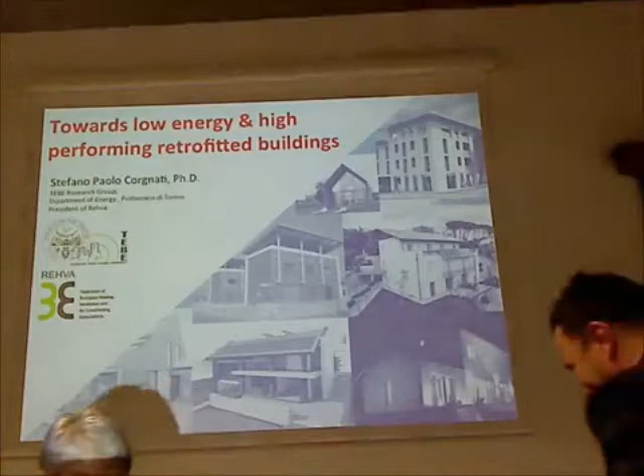The title is related to one of the main topics of the seminar. We have this big challenge to achieve, in a suitable number of years, this big dream of zero energy building. Of course, it is a path - we cannot think about having this immediately. I had the possibility to work a lot on this topic in research, but also with the European Commission, because now I'm president of REHVA, I've been on the board for lots of years. This is the European Federation of the HVAC system sector, so we work a lot with the European Commission in establishing the new directive and the new path toward high efficient buildings.

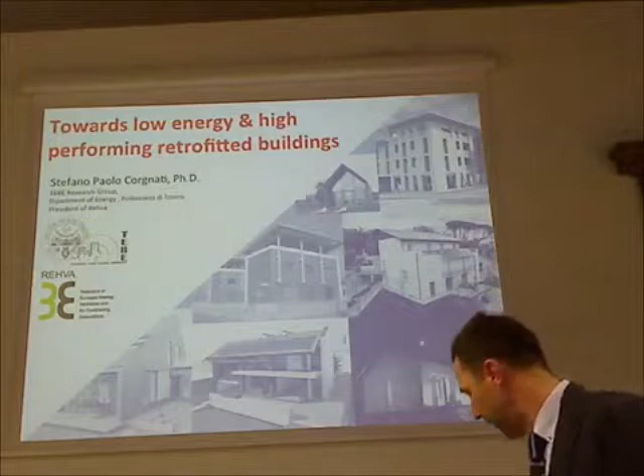As we know very well, now we are dealing with the second recast of the Energy Performance of Building Directive.

I think that at the very beginning of this century, there was an important mission of the European Commission where we set buildings as a priority in order to improve our capability to reduce CO2. But I think the main directive was the first recast, in 2010, that put into reality our main focus: that if we want to drive the energy sector related to buildings toward high efficient buildings, we have to think together economy and energy. This is the main issue we worked on during the definition of this second directive.

As we know very well, if we look at the effect at national level of this kind of directive, we have to say we are not so happy, because the directive puts forward the vision that you have to have transposition at national level. In Europe, as you know very well, it's quite a heterogeneous situation, so it is not easy to have the same approach in all countries. The situation country by country is very difficult, both from a technical point of view and from the economical point of view. So the answer of the market could be, and in reality is, very different.

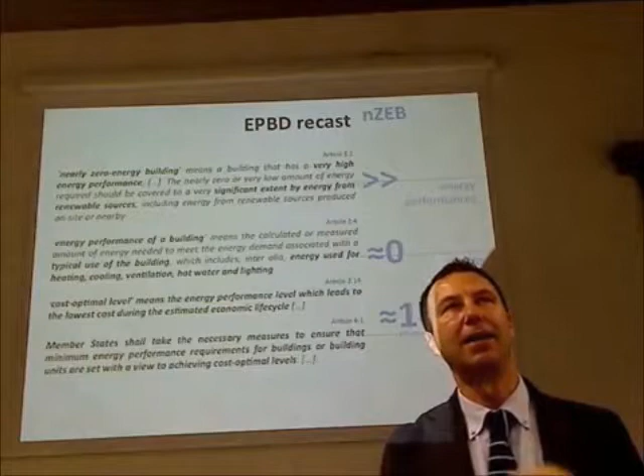When I'm teaching this topic, I explain that at the very beginning, when we start to design a building, we have some points that drive our concept. First of all, we should emphasize the reduction of the energy demand - that is, to do our best in order to reduce the energy demand of the building itself. That is typically called in architecture all the passive systems that we have around the building.

Then we have the second step, mostly related to my background, that is to use high efficient technologies. I'm a mechanical engineer, so let's say all the technologies that are inside the building and around the building - that is to reduce the energy requirement of the building.

And then, as we cannot think about having zero as energy demand, we have to supply the residual energy requirement of the building through renewable energy sources. So from the design point of view, it's very clear, and through this step we can drive the building up to a position where we can really reduce the use of fossil fuel in the building.

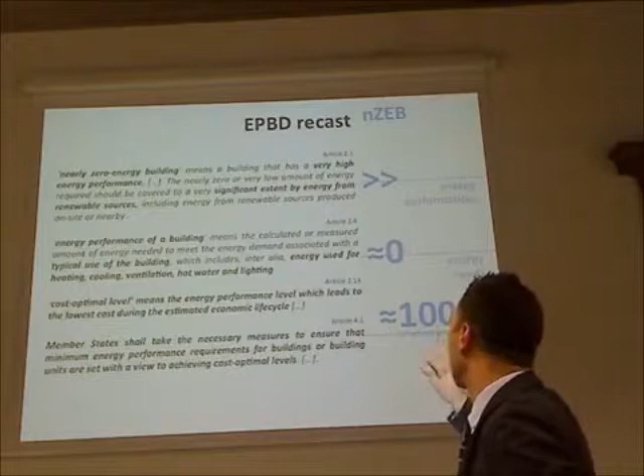High energy performance, almost zero energy need, 100% renewable energy sources, let's say. There is another important step: when I say zero energy need, we have to think about what is really zero, because we have some energy use that we cannot cancel, because they are part of our lifestyle.

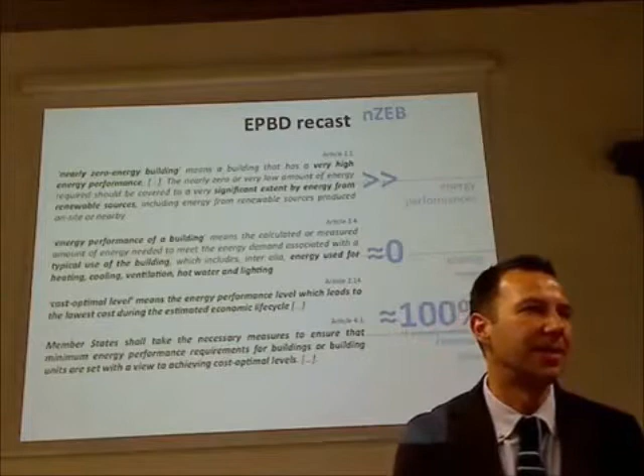Especially we have all the electrical requirements, so when we set zero, we are saying that we try to reduce as much as possible all the energy needs related to creating a comfortable environment in the building, typically related to heating, cooling, ventilation - air movement and mechanical ventilation is really a key issue. Another important issue is related to domestic hot water production. We can improve our capability to produce renewable energy sources, but we cannot think about having zero energy need in the building.

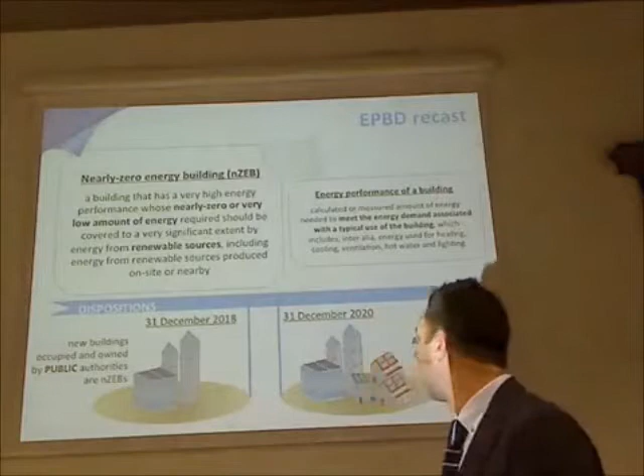As we know very well, the target is very ambitious, and now we are speaking also about public buildings. The next year is very challenging because we should bring this kind of concept into retrofitting and designing new public buildings. I have to say our public sector is not so in line with this target, not only in Italy but all over Europe. Consider that the vision of Europe is really ambitious, because in our roadmap up to 2050 we are targeting 90% CO2 reduction in buildings. That is really challenging. So, okay, we put the target, then let's do our best.

This kind of topic is also not so clear in its implementation. First of all, we have different approaches in the US, China, Europe, India, related to what we want to score. We introduced the concept of net zero energy building, the concept of zero energy building, the concept of zero carbon building - we are introducing lots of concepts. But at the end, I think what is really important is to have this final mission: to increase the energy performance of the building.

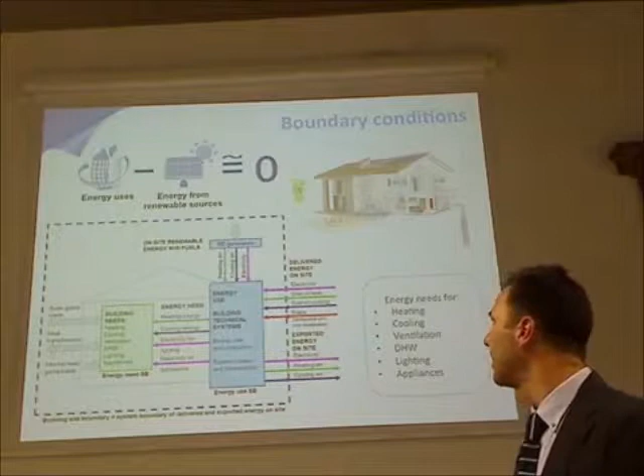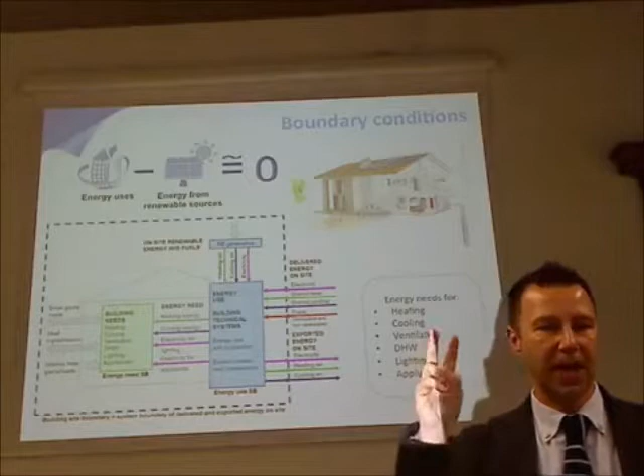So this topic is quite important to clarify at the scientific level, but I think it's so important to clarify at the practical level if we want to really implement this kind of concept, especially in the public sector. Here we tried, at least in Europe and the US, to have a similar way of representing the energy vector through the building. This is important, to have a common language and common way to represent things in order to put the boundary of the analysis at the same point.

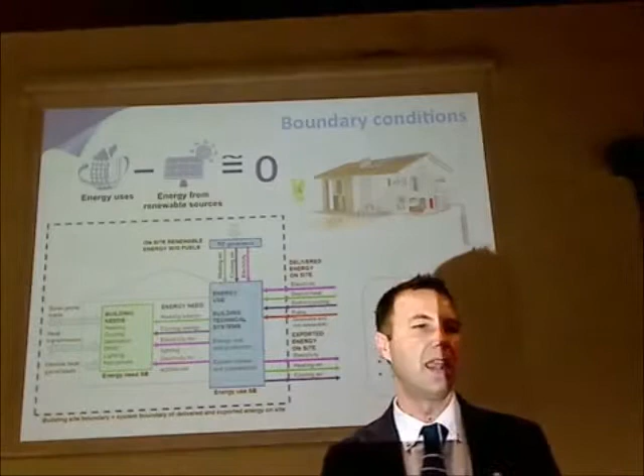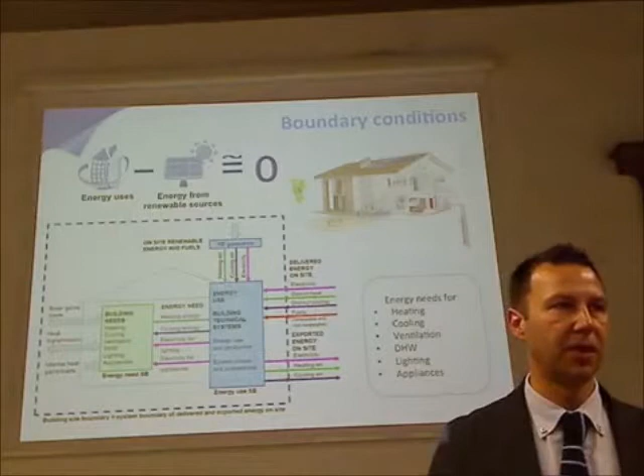This is another important issue - it's more scientific, but very important if we want to share and get the same results. Typically, if you look in the literature, you see lots of different papers explaining what a zero energy building is, or case studies related to zero energy buildings, but typically they have different boundaries of analysis. So the comparison is really difficult.

In reality, what is typically new in a high-performing building? Typically, what's new is that we tried to reduce a lot. I'm speaking about total space heating, to reduce this big amount that in a typical building is required for space heating. This was the first approach all over Europe, both in North and Mediterranean countries. We focused a lot at the very beginning on reducing the share of heating energy demand. So the first focus was to increase insulation a lot. If you see all the mandatory activity we had, it was mainly to increase insulation.

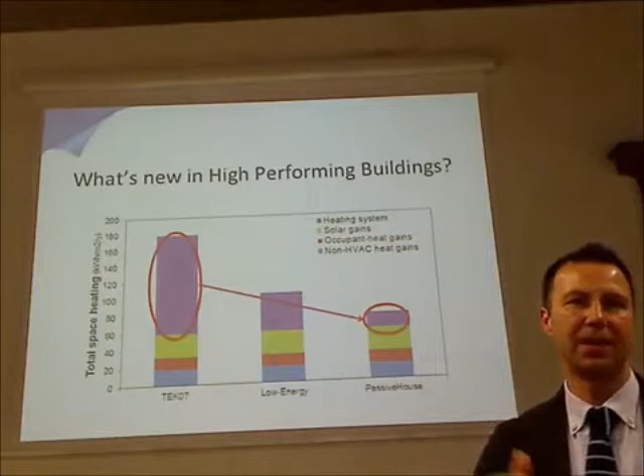Up to the concept of passive house, that was, as you know very well, created in Germany, then spread all over Europe with very, very dangerous effect, especially in Mediterranean countries. Okay?

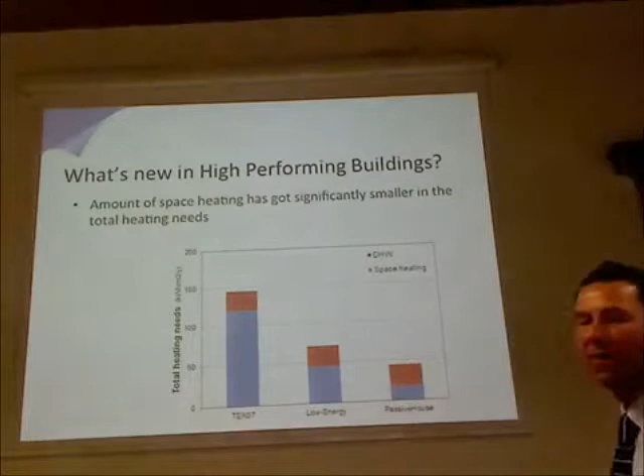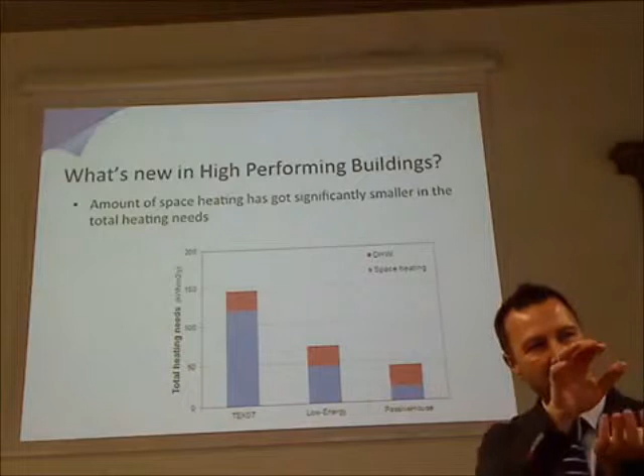But what is for me really interesting from the designing point of view is that in our new buildings, the amount of domestic hot water, which is from the energy need almost fixed, is now comparable with the other energy use for climatization. This, from the designing point of view, creates a new approach, because now the priority is to create an efficient way to manage domestic hot water. That is something new, very interesting, if we have time to do this.

So I tried here, from our point of view, to put some key issues. Big reduction of heating loads, that is to reduce the nominal power of the heating system. Then if we have a very small load, we have to be very reactive. The large share of domestic hot water. The other thing is to shorten the heating period. If you shorten the heating period, of course the payback period, if you want to invest a lot in the heating plant, it is very difficult to have a suitable payback period.

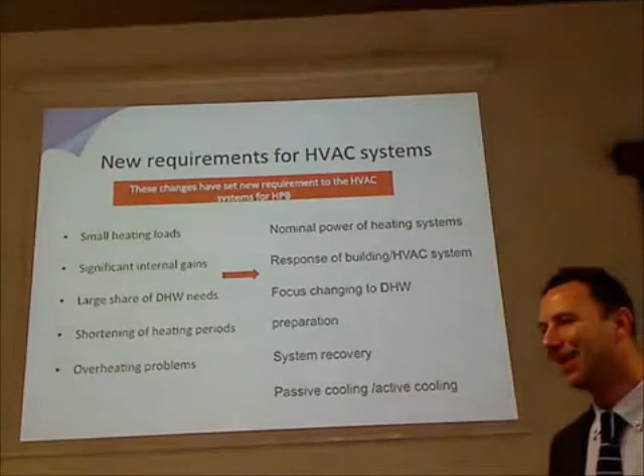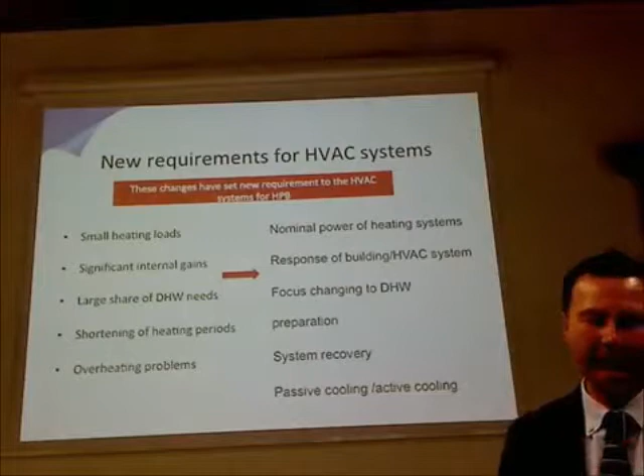And then this is a big problem now all over Europe, the overheating problem. All over Europe, from north to south, especially south, I want to emphasize the fact that we now have to deal with the other problem, that is to cool the buildings. And before cooling the building, it is better to apply passive solutions.

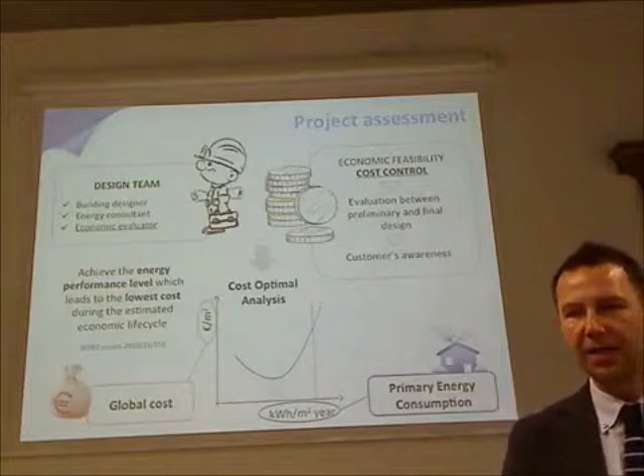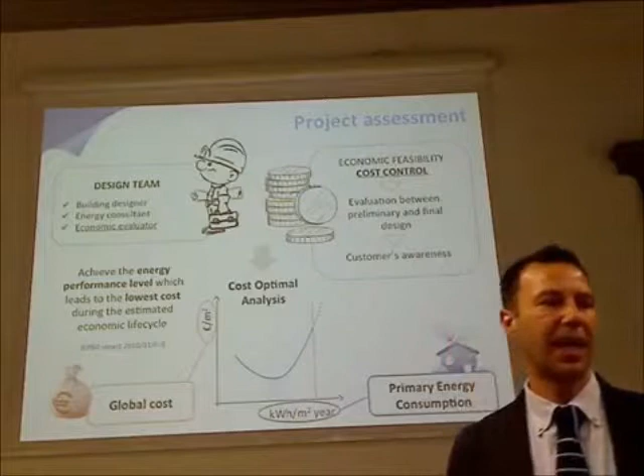This is the main part, the second main part of the presentation. There is a design approach, but I think what was really new in approaching a nearly zero energy building was the introduction, in the same analysis, of two important indicators: an economic indicator, we introduced the so-called global cost, but what is important for me is to introduce an economic indicator together with an energy indicator.

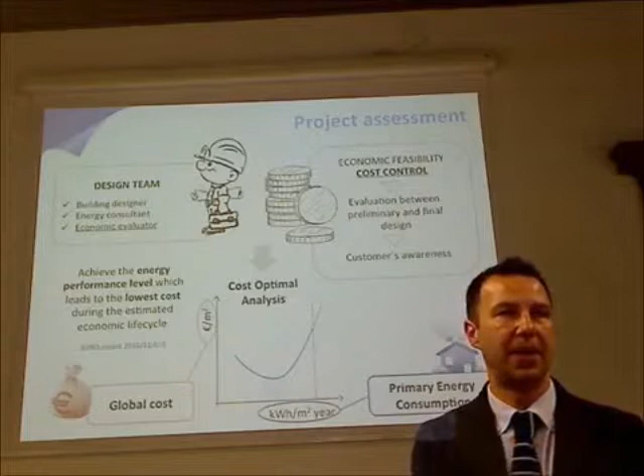Typically, we used global cost and primary energy. The primary energy indicator is, let's say, the main indicator used to classify the building, and we use here the so-called global cost.

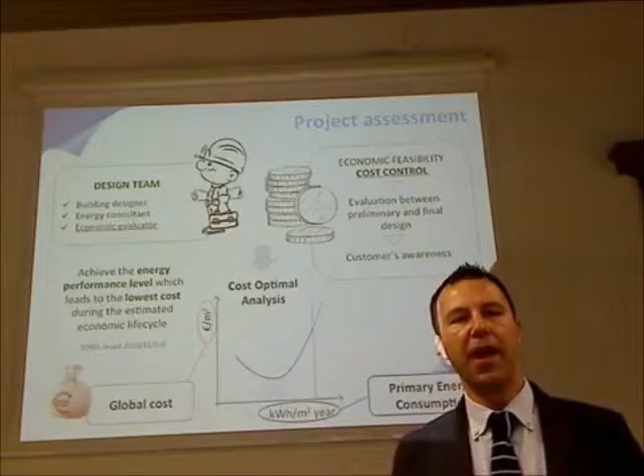Why do we use the global cost? Because we tried, in a quite simplified way, to have the possibility to think about all the costs over the life of the building, starting from the initial cost, that is the investment cost, up to the final value of the building.

So, in some way, we said that if we want to really score the goal of a high-performing building, we have to balance this trend. So we must not emphasize from the very beginning the energy performance if the market is not able to get this energy performance in reality. That is, we don't have to push the market up to an A+++++ building if the market is not able to get this building. And as we know very well, this was a very weak point in the first directive, because all the countries pushed a lot to have a very efficient building without any answer from the market.

In fact, the number of efficient buildings is very low. The market of retrofitting buildings is very low in comparison to the potential. Okay?

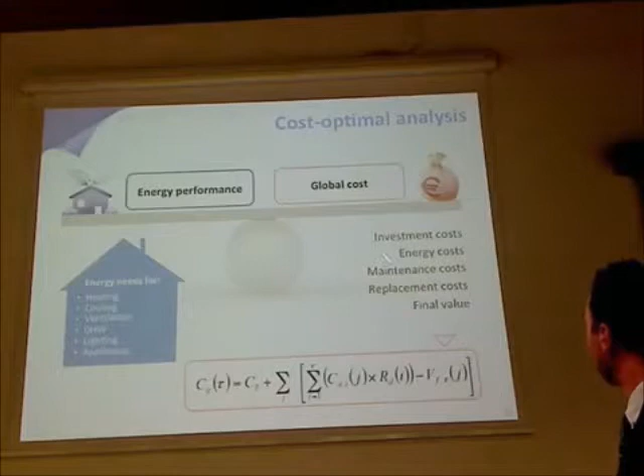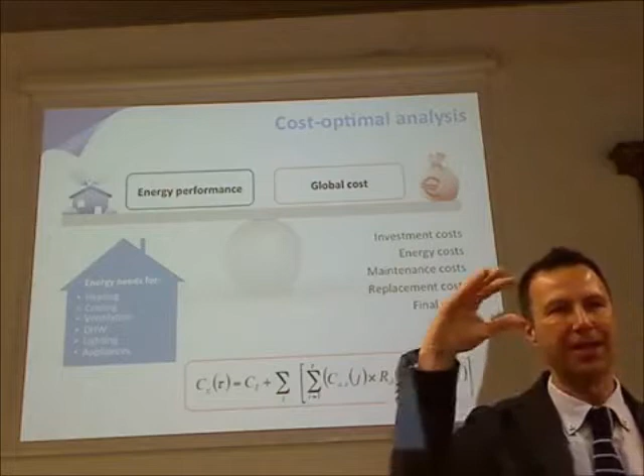This is the balance. Of course, we try to understand the investment cost, energy cost, maintenance cost, replacement cost, final value. I always say to my students, in the engineering and architectural faculty, that economic evaluation of a project is one of the key issues now if we want to understand the energy tendencies of the building market.

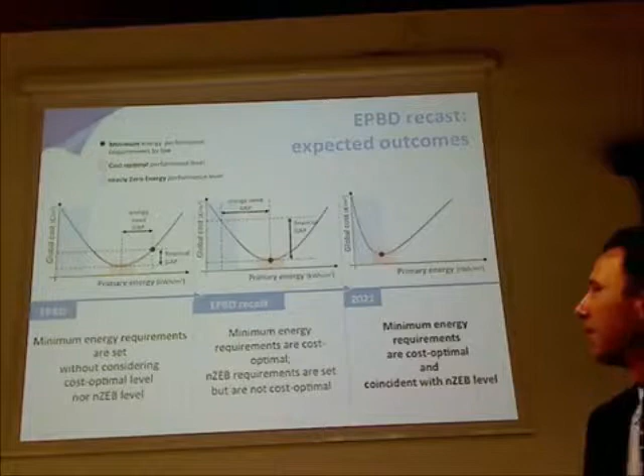The general results we want to score at European level was that if we set at the very... okay, what is the key issue? In this curve we always have a minimum. This minimum, or around this minimum, we have the so-called cost optimal range.

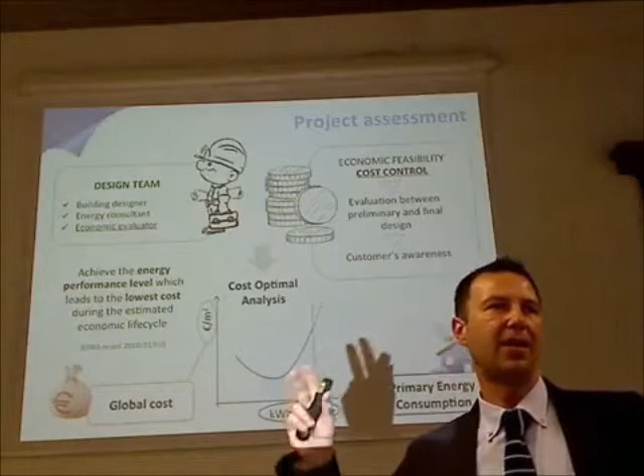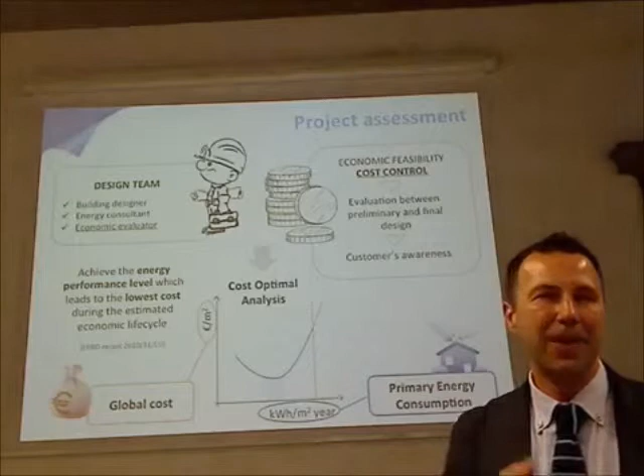The cost optimal range is the good trade-off between investment cost and operational cost. Here we have the investors that I call green investors, that would like to invest a lot, have a very clear objective to have a very high-performing building, and investment cost is not a problem for them. That is, the bank has to give you lots of money. So frankly speaking, that's 5% of the market.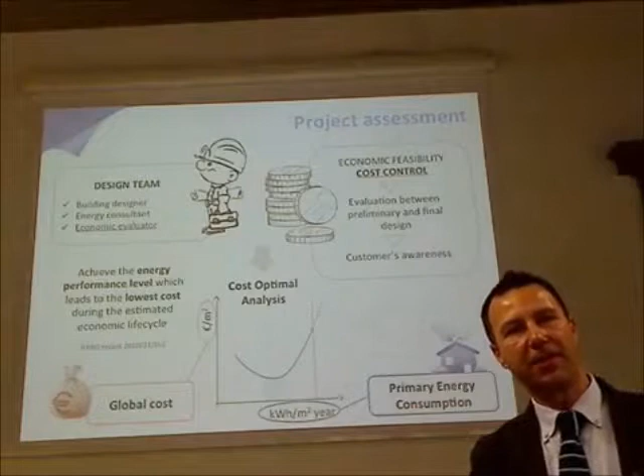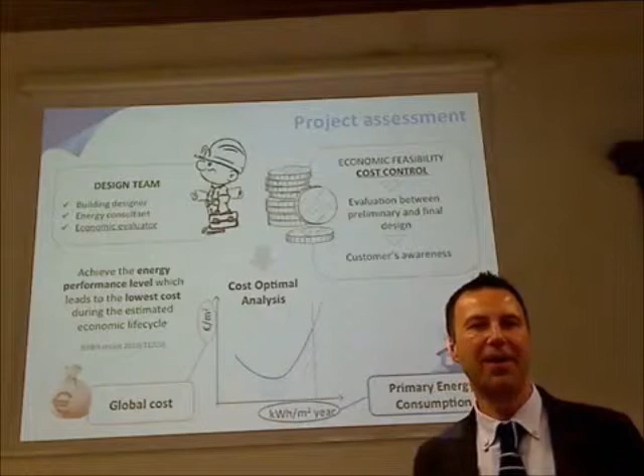Here we have the good trade-off between investment and operational cost, over the period of analysis that, according to the European Commission, is 30 years for a residential building and 20 for the other. If you speak to an investor, these are too long a period. But anyway, you have this balance - these are what I call the wise investors.

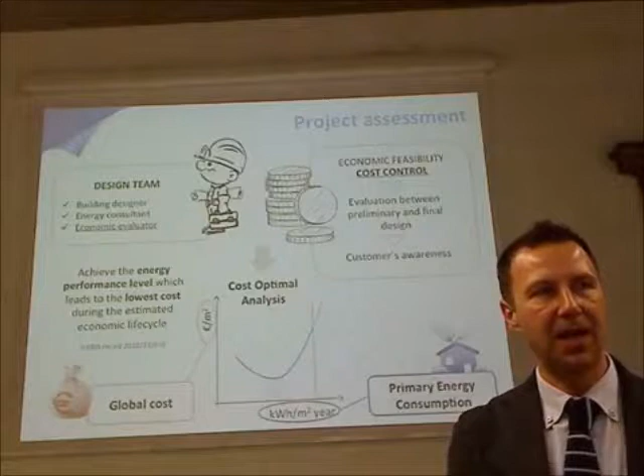Here there is a big potentiality of the market, which is to try to emphasize step-by-step improvement of the energy performance of the building through investments that are not so big, that can be spread through a very wide number of people.

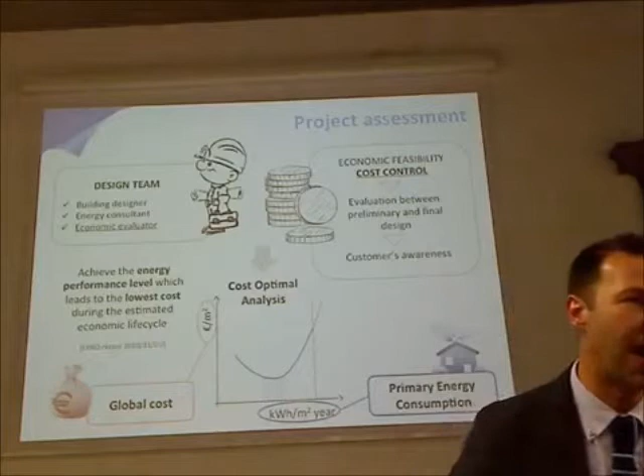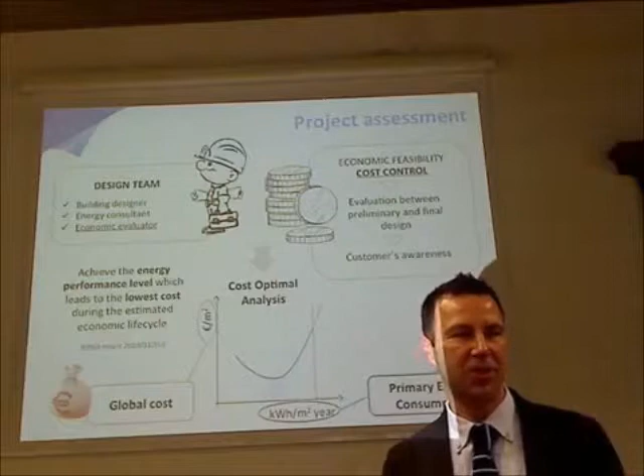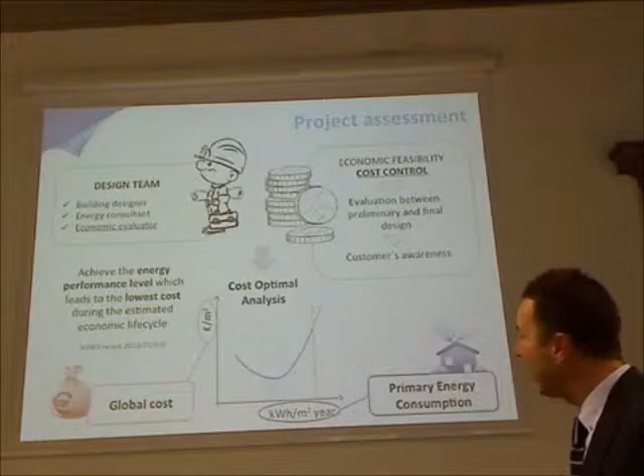This is very important from the energy policy perspective, because if I were tomorrow one of the advisors of the energy policy in our region, and I wanted to reduce highly the CO2 emissions, I should have the possibility to increase as much as possible this kind of market, and also this one - because this is what we did in some specific activity in our region, but related to only 5-6 buildings over the whole building stock. So they are good extreme examples, but they are not able to enter the market.

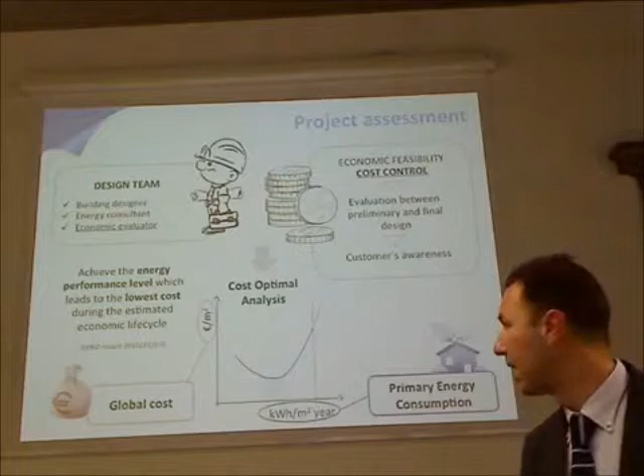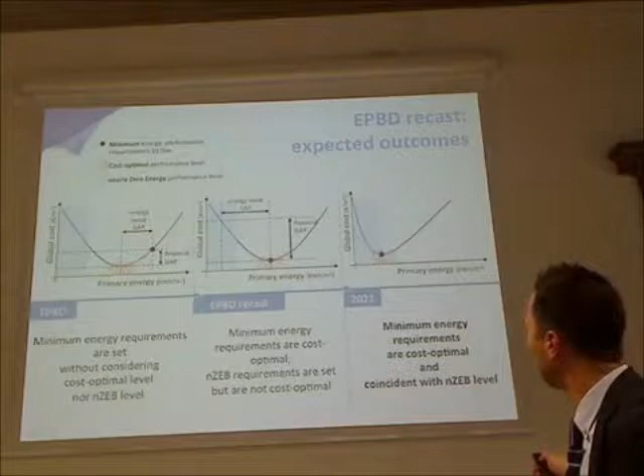The idea of the European Commission was to start in a situation where the cost optimal is around here, but through improvement and cost reduction of the technology over the years, this point moved little by little up to what we typically call nearly zero energy building, which is less than 30-25 kilowatt hours per square meter of primary energy, typically in our minds. So it's a path.

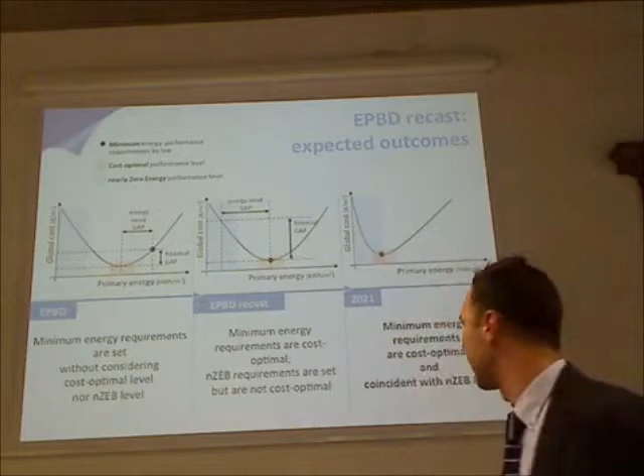The procedure is very interesting also for a designer. So it's not only interesting from the scientific point of view - we did lots of publications and that was fine for me - but also from the very practical point of view, because if a designer is able to use this kind of procedure, they're able to show the investor different options according to different costs and different goals.

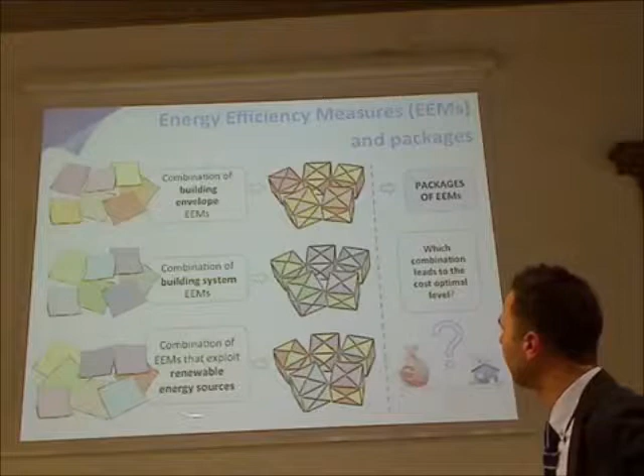So the idea is always, when thinking about retrofitting the building, to consider different combinations of building envelope energy efficiency measures, different combinations of building systems - HVAC plus electrical system energy efficiency measures - and integration of renewable energy sources. Here you can see the path we discussed at the very beginning: reduce the energy need, improve the energy efficiency, use renewable energy sources. At the end we have packages, and at the end we have cost optimality.

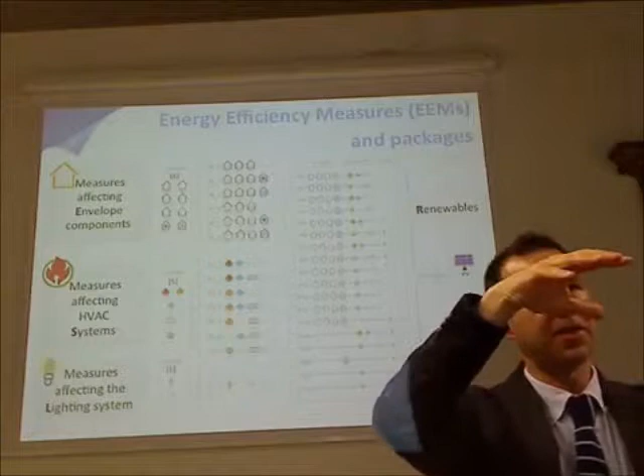So we have the combination of different possible activities. Each of them has an effect in terms of energy and cost, and at the very end we have something like that. It's very practical - I did it for the municipality of Istanbul for retrofitting the building stock. Today we don't have the possibility to speak a lot about how to create the so-called building types.

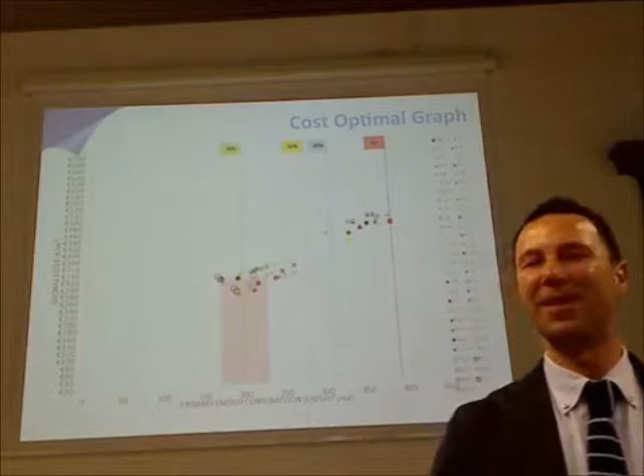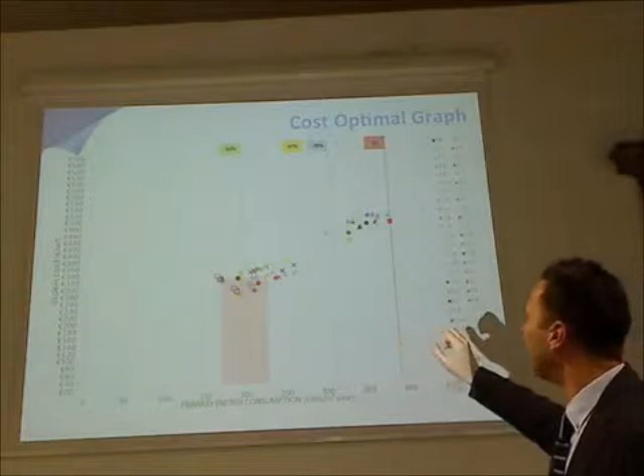That is another interesting issue - how to make a cluster of buildings, the concept of archetype buildings, which is very interesting from the scientific point of view. But let's consider this as representative of a part of our building stock.

Each point - this point is the initial point, the reference building, which has only costs related to operation over 30 years. All the other points are related to retrofitting actions on the building, related to different combinations of the efficiency measures defined before. And these are different targets of energy reduction with respect to the reference building.

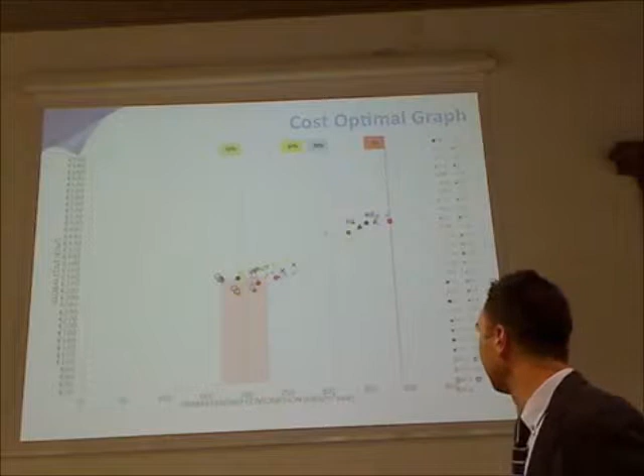This is reality, so as you can see, if at the very beginning the energy performance is very low, to get 50% it means that I'm moving from 400 to 200. That from the general point of view seems to be very low as a final result, but from the relative point of view it's very high.

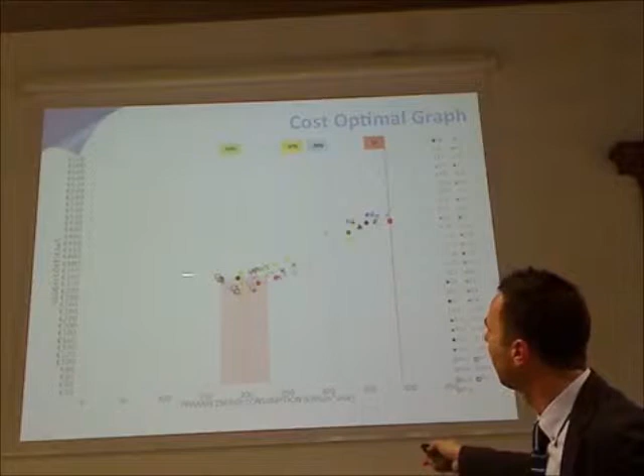If you see this as a system, it's very high. And this is the so-called cost optimal range that is related to the number of possible options of retrofitting, where I have the good trade-off between investment and primary energy.

I just go very briefly to a very practical case study, that is my house, to understand that if we want to speak about one thing, you have to manage. But what was very interesting was that the investor, my wife, was really wise in managing the economical issues.

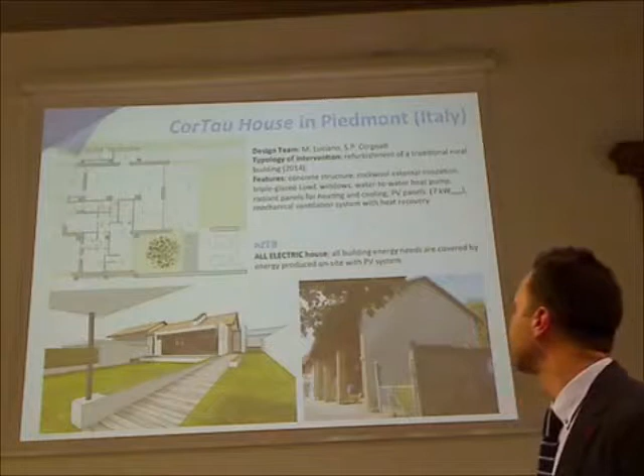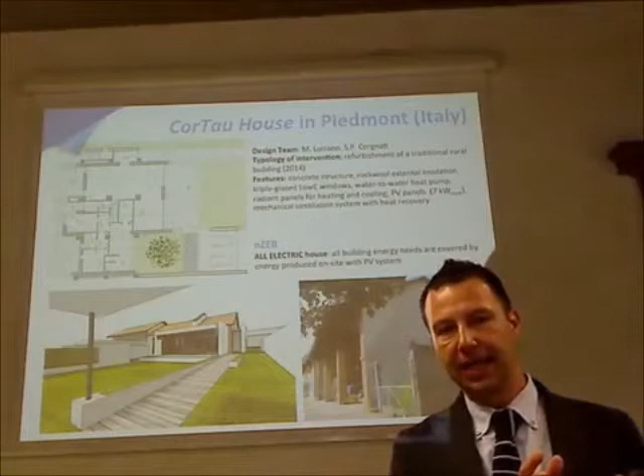So the idea was to start with a rural building, and we tried first of all to have an all-electric building. The tendency at European level is to move from gas to electricity, especially for single houses, also for all the conditioning of the building. So I think it is one of the first ones in Italy. It was the first one.

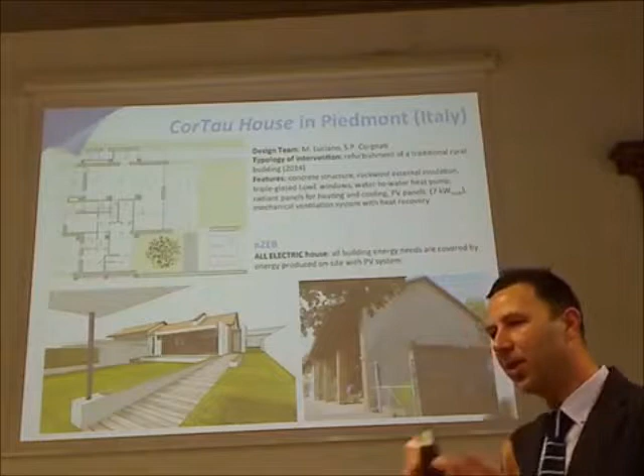But what was important, in my opinion, is to introduce the cost optimal concept to clarify to my wife what was the target that we have to obtain and what she has to invest. That was the most important.

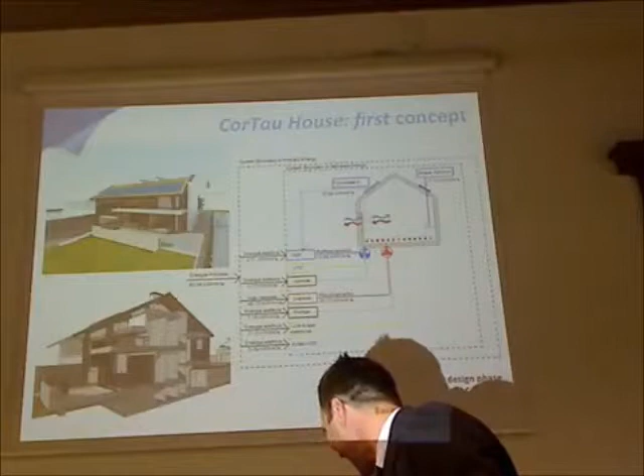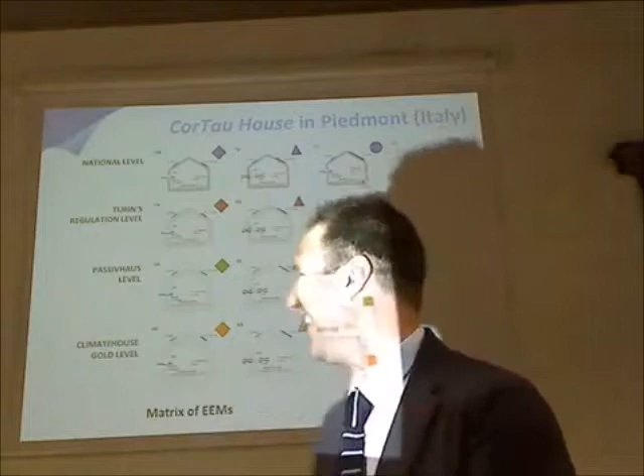Okay, so very briefly, I approached the problem in a very practical way. I tried to create a quite clear matrix where I put here different solutions in terms of HVAC. CorTau means Corgnati Taurino, to be very... Taurino is my wife, so we are working together. So this is a very basic solution.

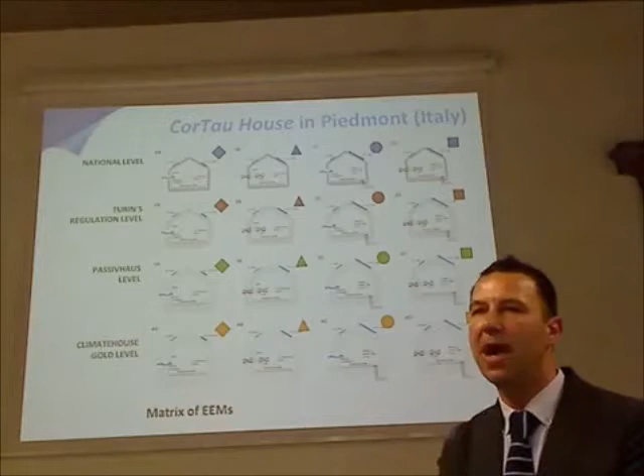So, Radiant system - I have no time to enter in detail why radiant, because she wants it. I had no negotiation about that. I don't think this was the best solution, but as you know, the architect and the investor has a very predominant role in this negotiation.

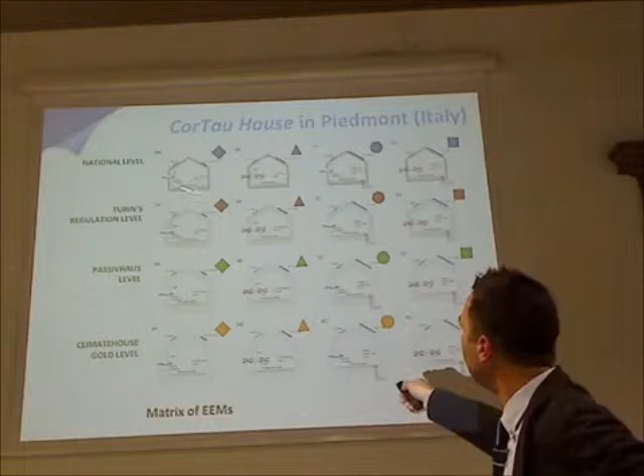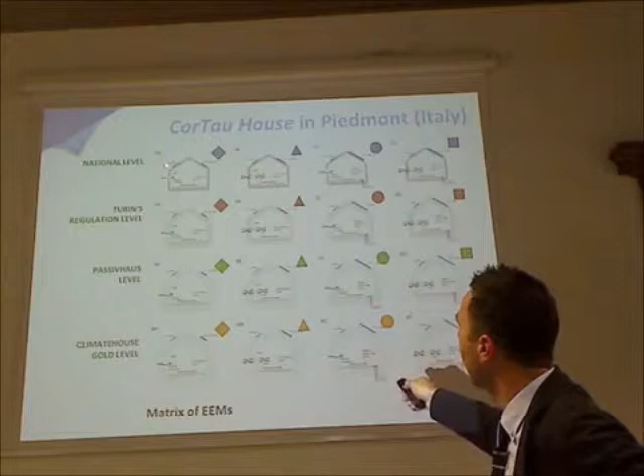So it's a negotiation, but at the end it's fine. So: radiant panel, a condensing boiler, a split system for cooling, natural ventilation, solar panels for both domestic hot water and photovoltaic panel. Moving here, I introduce one of the key issues, that is the use of mechanical ventilation with heat recovery.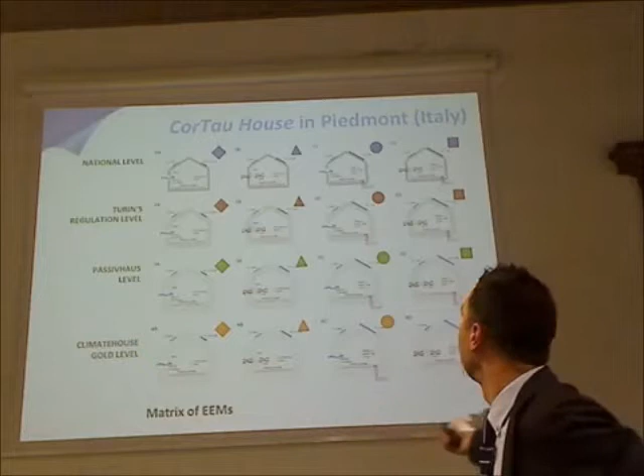This is a very important issue, but it changes also the way by which you use the building. So we introduce also other important issues related to user behavior and so on. Here we move from condensing boiler to heat pump, water-to-water heat pump, very efficient, for heating and cooling, together with mechanical ventilation.

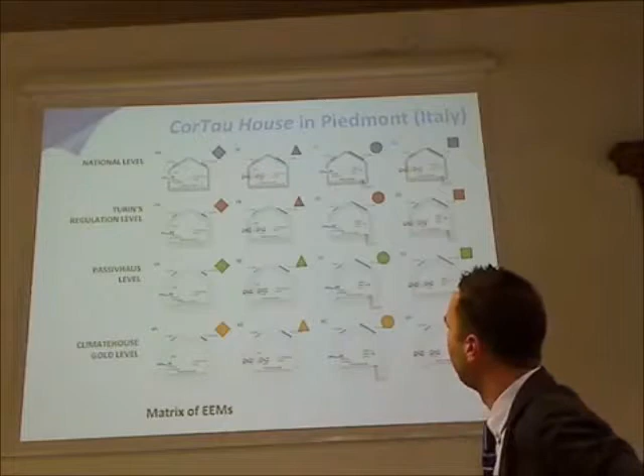Insulation: here, different levels of insulation related to different standards, related both to the opaque envelope and to the transparent envelope. At the end, okay, simulation, papers, but at the end, this was the most important goal to discuss.

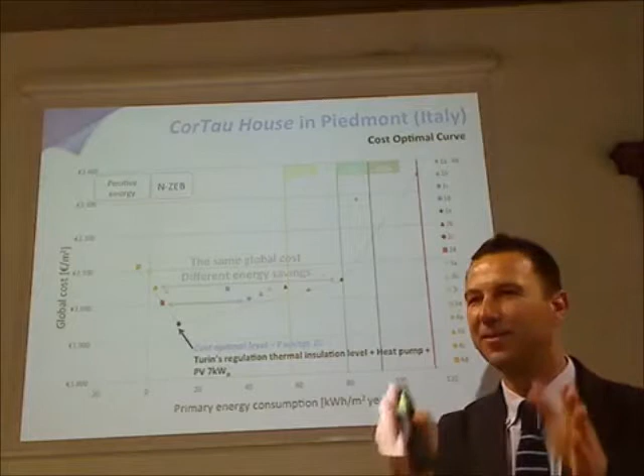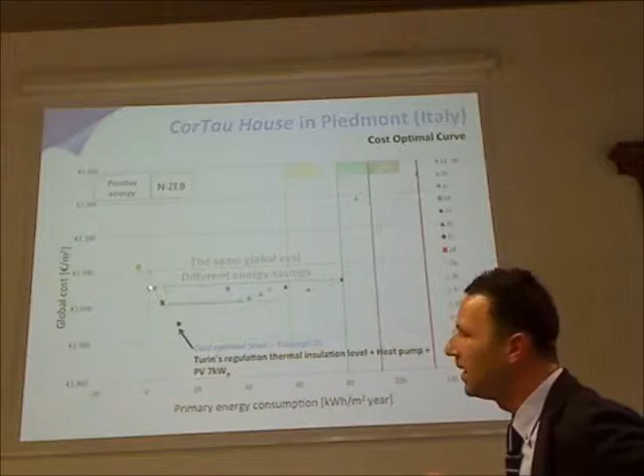First of all, I demonstrated to my wife that investing over a long period of life together - because this was a prerequisite, at least 30 years - the investment we can get, with the same global cost, a building with 80 kilowatt-hour per square meter of primary energy, or nearly zero. Of course, this is related to a higher investment cost.

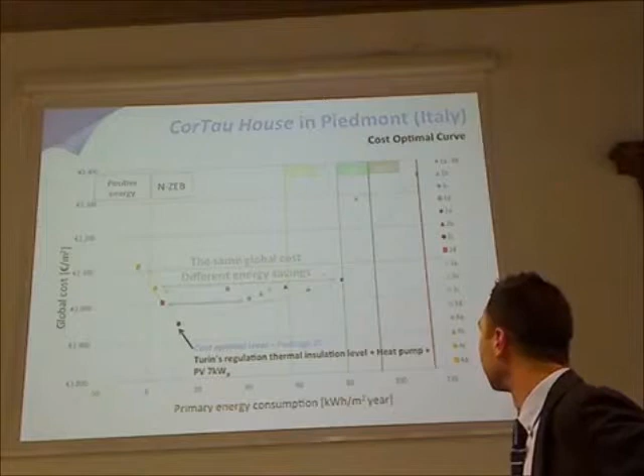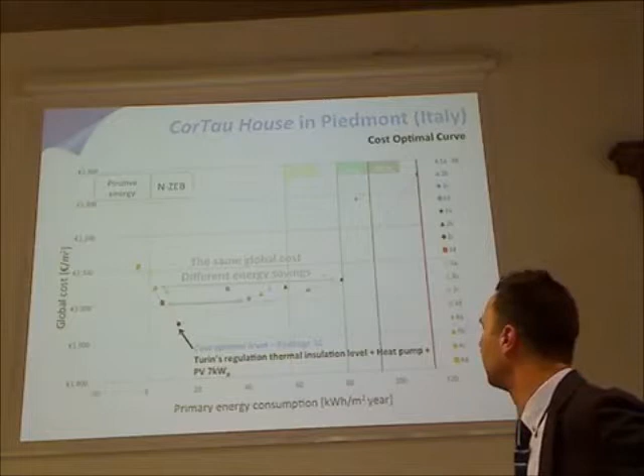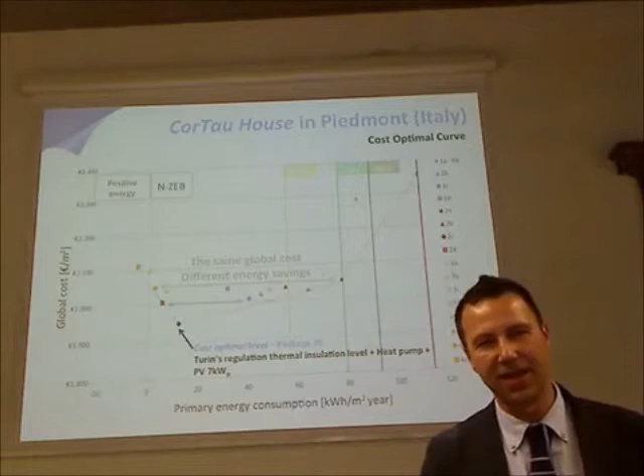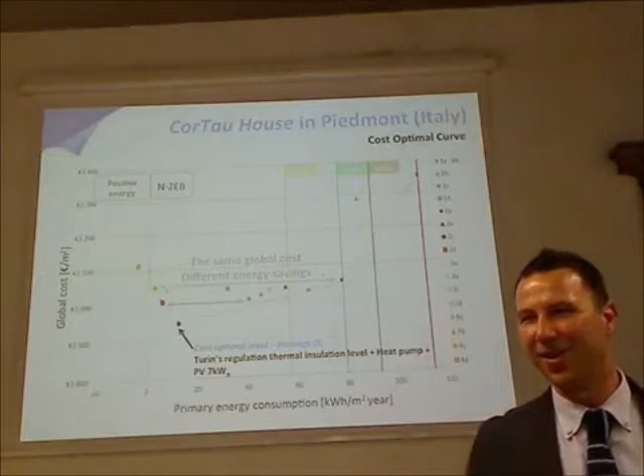Just to be clear, the investment cost was a little bit less than 2,000 euro per square meter. But I have to say that interior design was higher, so let's consider also this - the selection of lighting, as you know very well. So you have also to think about that.

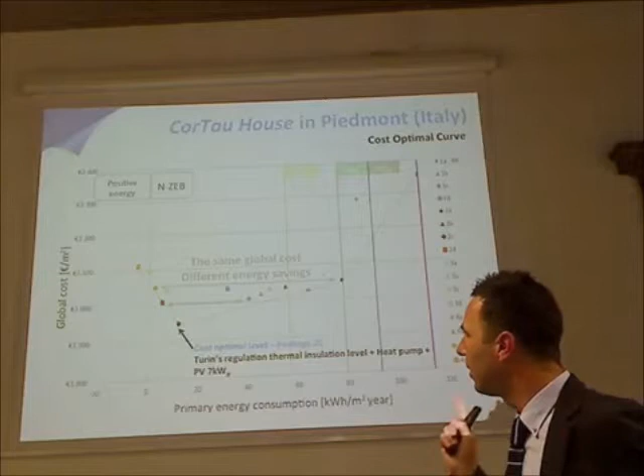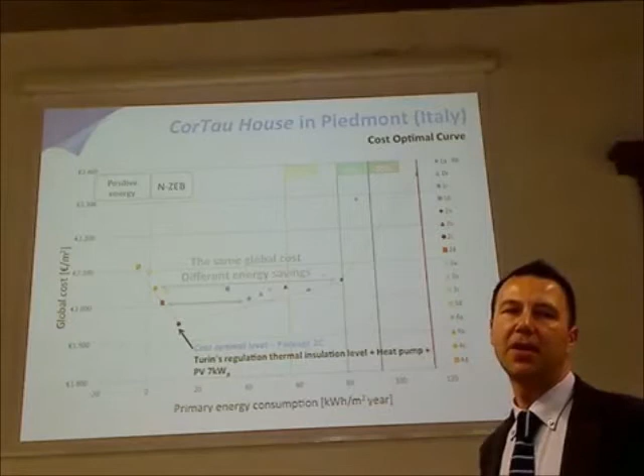At the end, we did it. What was important for me was to demonstrate that you can also have some very good results. Then we have an extension of these results: if we want to have a quite good high-performing building, around 40, you can get it also with an investment cost that is around 1,500 - that is quite a good reference in our market to have a high-performing building.

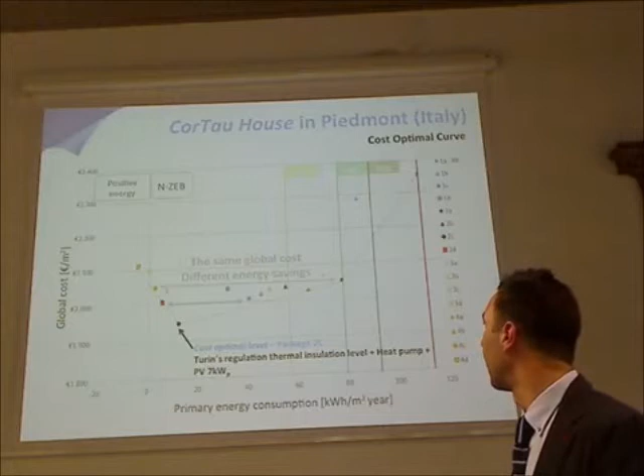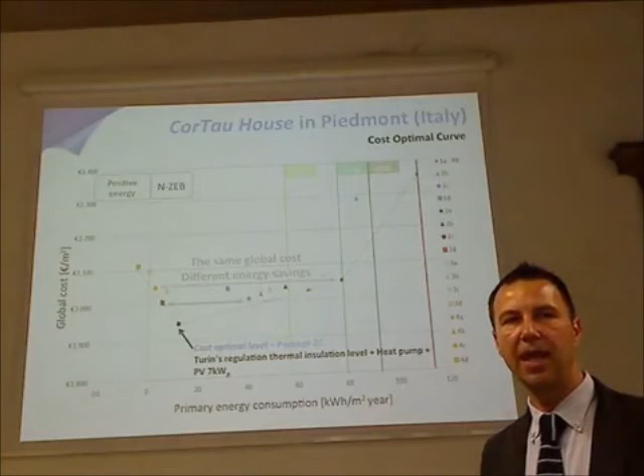So at the very end, I have to say that the path is difficult. We have to clarify to the investor what is the path that he has to follow, but for sure there are no technological problems to do this, and also if you approach in the right way, a very clear approach in terms of economy, the market can have a good result from that. So thanks a lot.